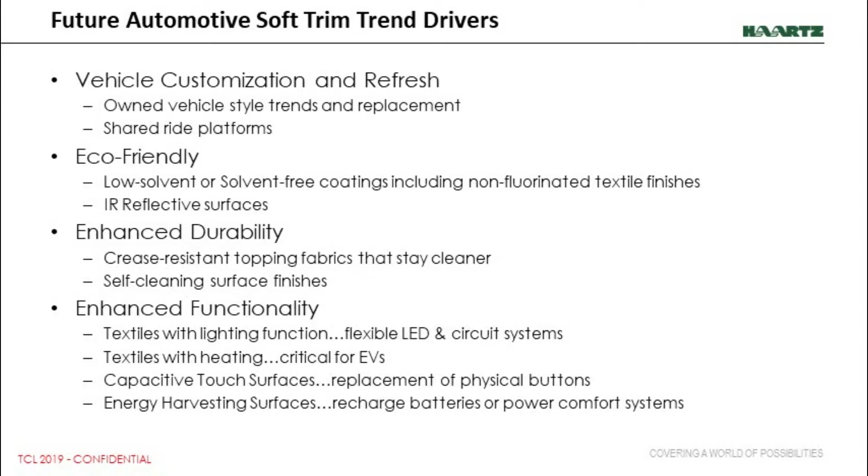So looking at vehicle customization, for people's own vehicles, we see a strong trend towards making them customizable or even having interchangeable trim, or for used vehicles, making them look new again. And a good example of that was actually unveiled just last month at the Geneva Auto Show by Fiat, their Cento Venti concept, pardon my Italian, where this EV is going to be offered with 4 different roof combinations, bumper combinations, wheels, wraps, and some interlocking mounting system in the instrument panel to allow the individual who's buying the car to customize it to their own tastes.

When we look at bespoke vehicles, these are cars that are created one-offs for an individual. And not all of us are individuals that can buy our own one-off car, but if you're lucky enough to do so, we have the ability to support an individual color, for example, or design of a material for one car. So those are trends in trying to make the aesthetics of the vehicle to their favor.

Going to the shared ride concept, as was mentioned earlier, Uber is very popular. We look at that in the United States and we see a downward trend in people actually getting their driver's licenses. So it's clear that people aren't going to want to own their own cars in the future. So as an example here, this Moia concept from Volkswagen is actually running now. If you've got a chance to go down to Hanover or Hamburg, you can call up on your smartphone a ride with Moia, they'll pick you up wherever you designate, take you on your ride.

And in these applications, we're looking for interior trim components that are somewhere in between mass transit, like airplanes, buses, trains, that type of performance and functionality, versus an individual personally owned vehicle. People are going to have a higher expectation level for the comfort and the durability of these products, and how easy they are to clean and how easy they are to update and refresh.

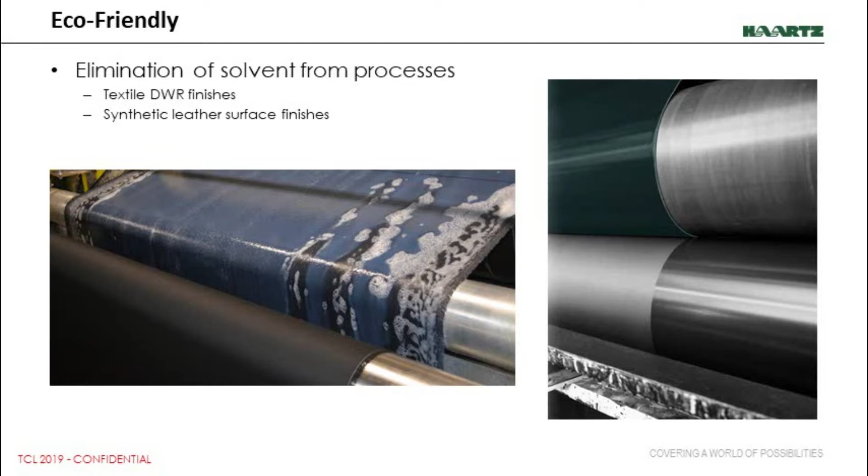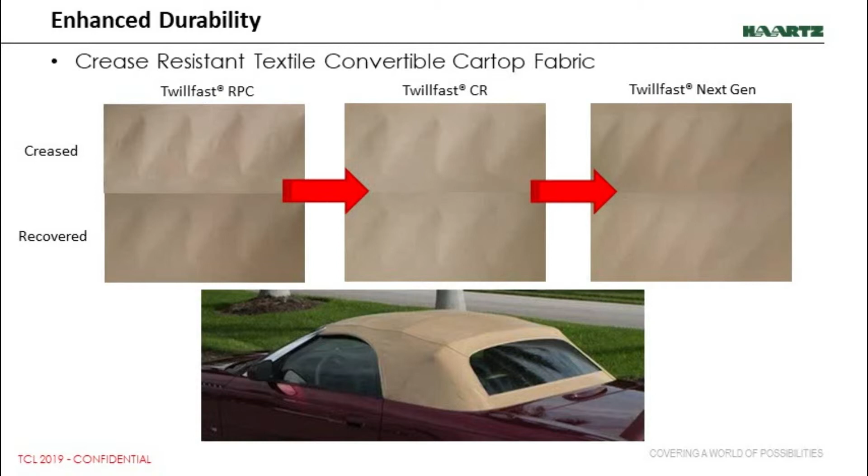From the standpoint of easy clean or self-cleaning surfaces, all joking aside, New York City taxis are pretty gross, as are taxis pretty much anywhere else in the world. And nobody wants to come into this type of situation when they're hopping in a vehicle.

So we're going beyond the traditional requirements of having fabrics and coatings on our products that are stain resistant from denim jeans or from other chemicals, and moving towards coatings that can either clean themselves through photocatalytic action, or coatings that can have an antimicrobial property that's rechargeable. It's not just use it once and it's gone.

It can be replenished. And the ultimate goal here is, especially with shared rides, to give consumers confidence that when they're jumping into a vehicle to go for a ride, they're not going to sit down in something they don't really want to sit in.

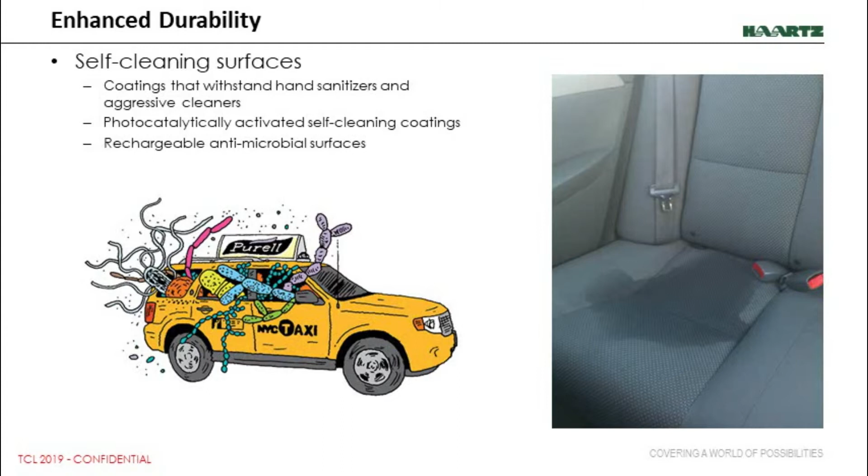Switching gears to functionality, one of the biggest areas that we've been working on recently is in the area of lighting and introducing a flexible circuitry and lighting feature to our convertible car top and other types of textiles. And this can be from the standpoint of creating an illumination for an aesthetic effect, or even creating some functionality from ambient lighting inside the car so you can read a map or see something in the trunk.

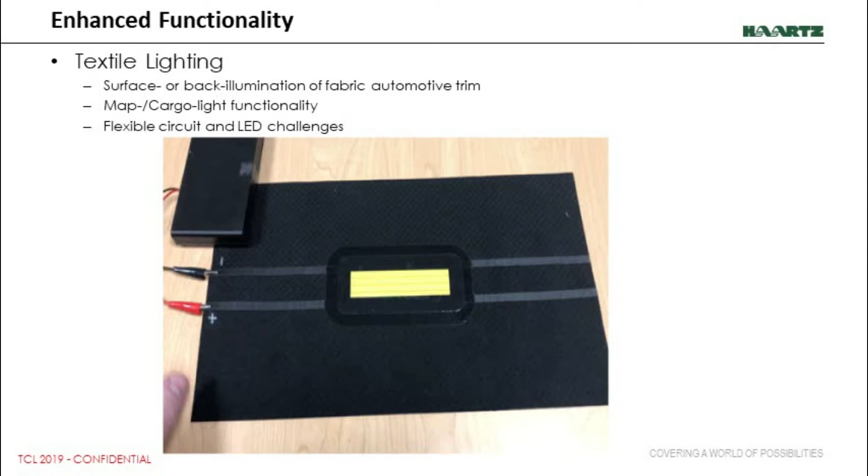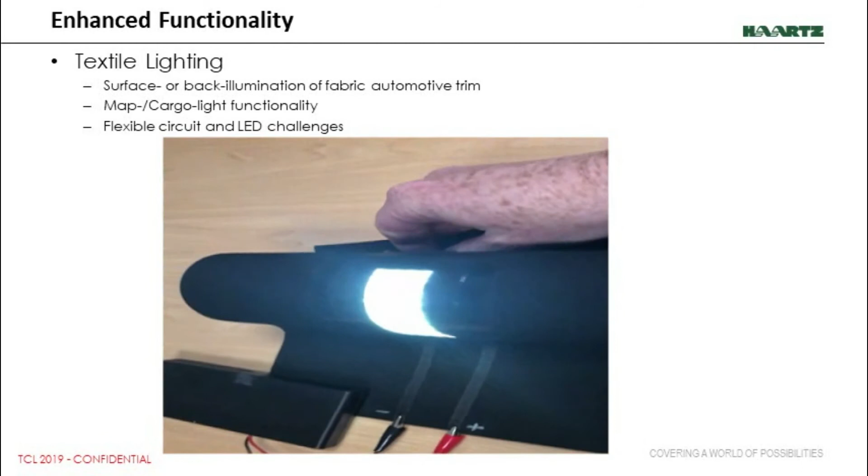So this has really been focused on developing flexible circuitry, flexible LED membranes, and encapsulant and adhesive films to bond these assemblies together. And I'll run the movie here. Basically, this is a convertible car top product where we have a battery pack on the left that we flip on, create a pretty powerful light that inside of a car would help you read, and it's still very flexible and drapeable. There's all kinds of functions beyond automotive for this type of application as well.

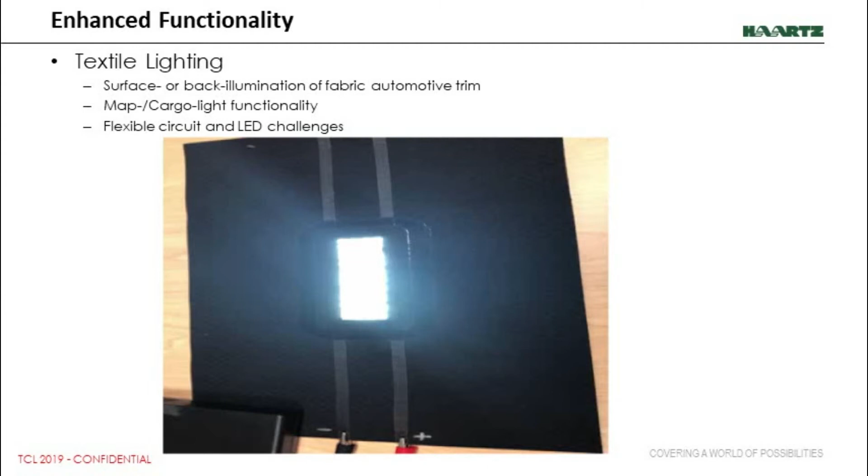Also in the area of functionality, heating. Car seats have been an area where there's been a lot of work in the past done on resistive wire systems to heat car seats. What we're working on here is a particular problem for EVs, electric vehicles in the future, where there's no waste heat generated by the engine that's used to heat the cabin. So electric vehicles are just not easy to heat up.

So what we're looking at is a carbon nanotube product that can be produced in a sheet or a web form and laminating it onto our traditional coated fabrics or moldable products. And then that could be integrated into trim panels or heated seats, where this carbon nanotube, once current is applied, heats up and emits energy in the far infrared spectrum that our body naturally absorbs quite easily, and it warms us up. So it's a direct form of heating inside the vehicle.

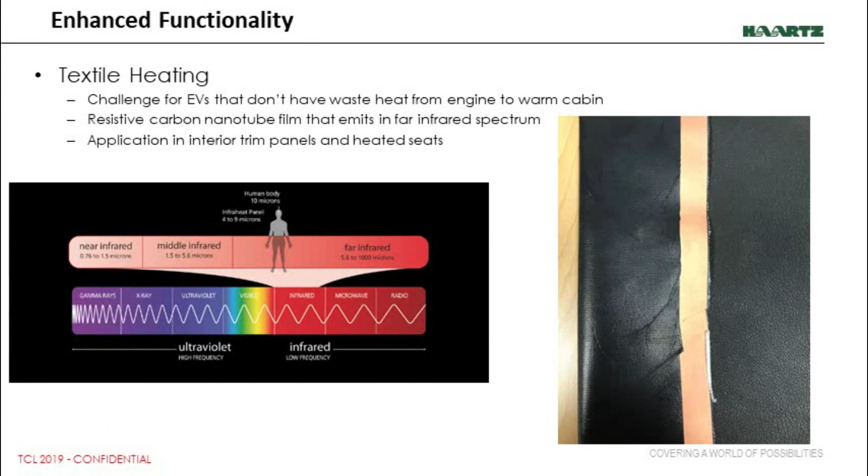and it can either be the surface that you touch or a substrate below the film that we apply onto the surface, that depending on the resistivity that the system detects, it knows where you're touching the surface of the material. And you can use this in a tap functionality, a slider functionality. You can create a lot of different motions to control the surfaces inside of the car.

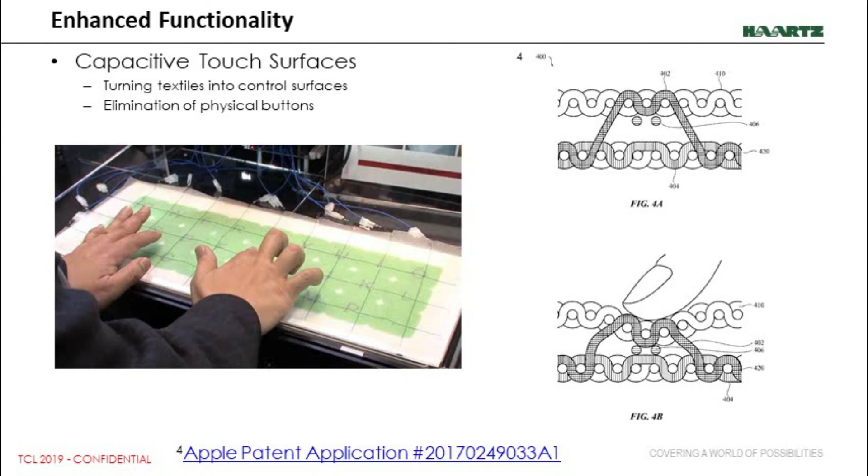And then lastly, there has been some work done in flexible photovoltaics. People are talking about integrating those as covering surfaces on the outside of vehicles. This can naturally be applied on coated fabrics as well, laminating flexible PV modules onto coated fabrics. There's also been some work done on integration of PV coatings into fiber and yarn structures that are directly on the surface of the textile, printed on.

Again, in most cases, we're not seeing the potential for these energy harvesting systems to actually charge the battery, but it could give you the opportunity to power other functions and processes inside the car so that the battery doesn't get drained. So things like recirculation fans for keeping the car cool in the summertime.